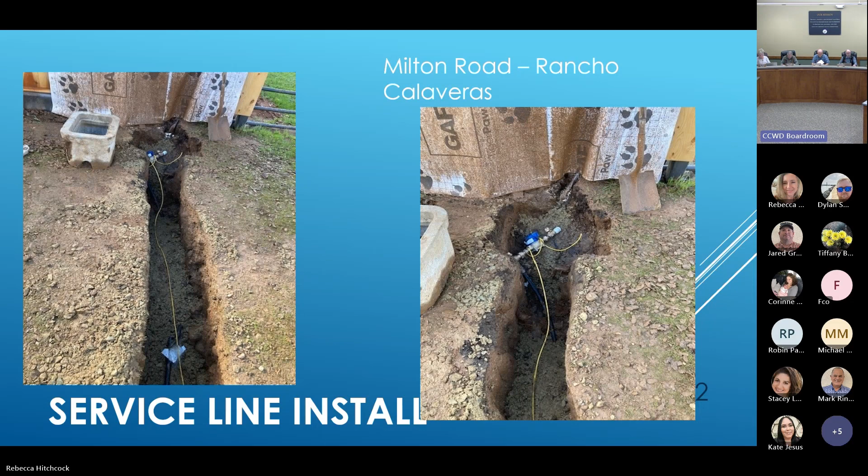So this is a service line install, a new service install off Milton Road, Rancho Calaveras. You guys have seen these before - we mark the water service line, put tape, put wire so we can locate that line in the future. So the image on the left, you can see the tape, water line below tape, and then the connection at the meter set. You see the meter box sitting there with the backfill of the AB over the line.

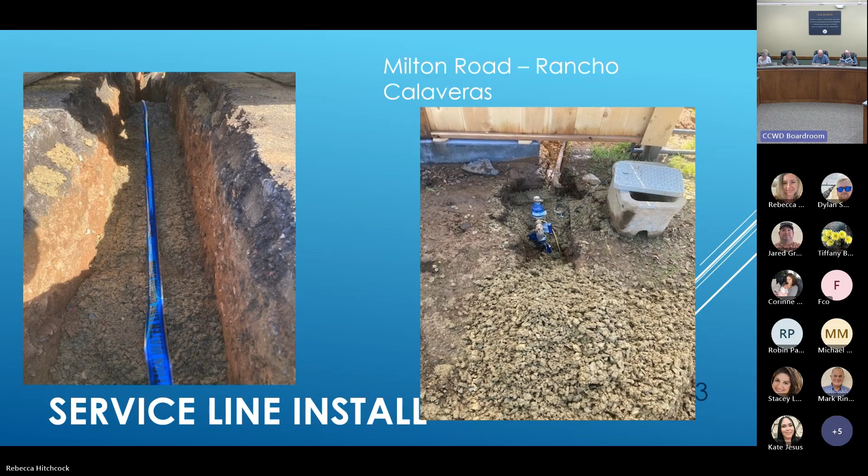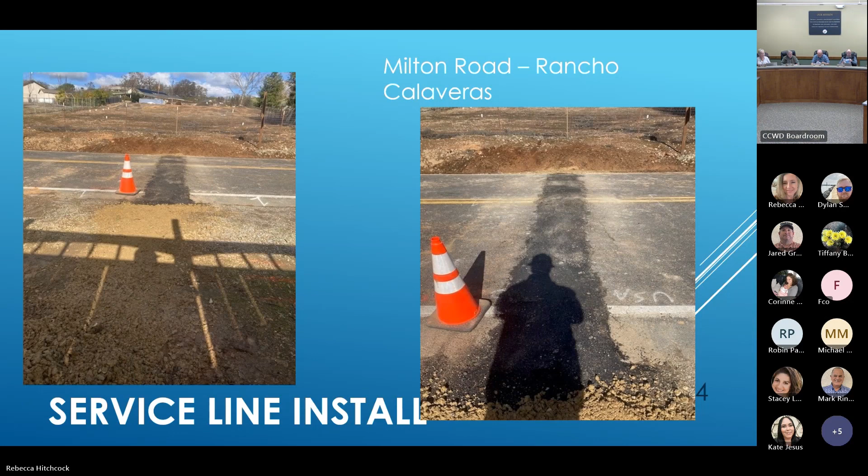So this is oftentimes what is getting final paved. We might have 5 of these and then 3 by 3 squares all over Rancho Calaveras that we kind of add up, so to speak, and then we'll call a paving contractor in to come get that work done.

And so that's what you guys will see through the ops budget in the paving and repair aspect of the ops budget. So this is an interesting one, 2-inch main repair on Jenny Lind Road, Rancho Calaveras. We have a lot of these - this is that old Bluebell line. These 2 inches will come apart at the valve, and what'll happen is oftentimes we'll have to shut the bigger water main down to repair the 2-inch main.

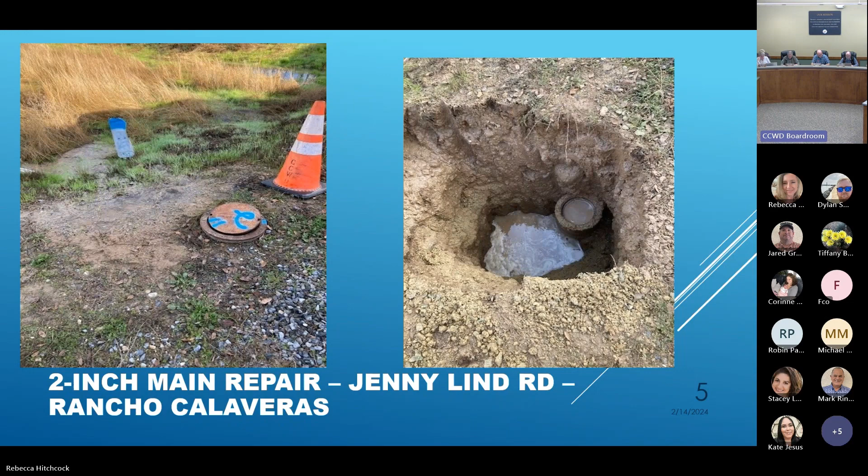So one of the things you're going to hear from staff, if you see them out in the field, is more valves are always better. So if we don't have to shut 500 people off to fix a 2-inch valve, that's always a benefit to everybody. In this case, we had to shut quite a few people off in order to replace this valve.

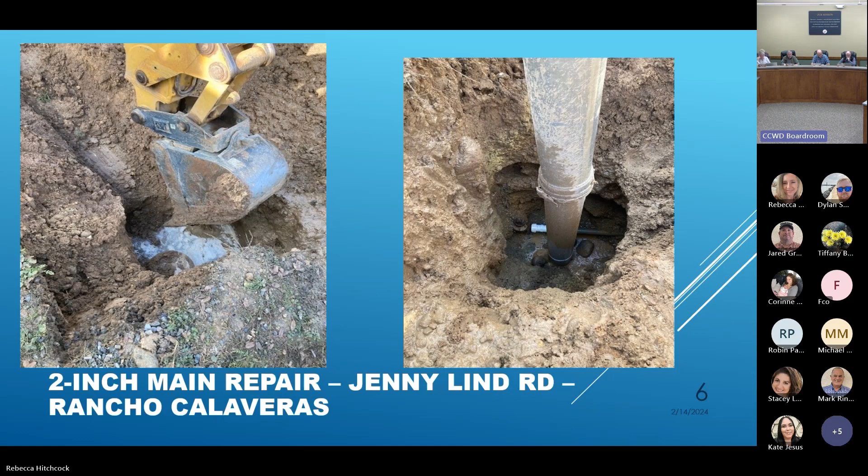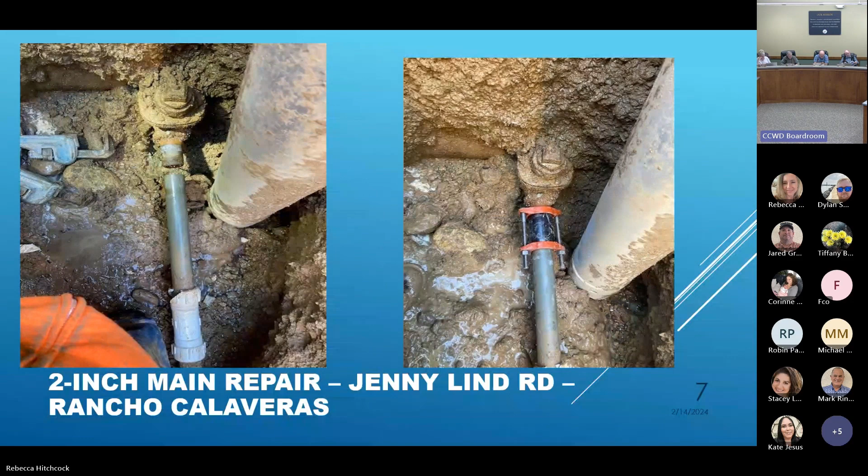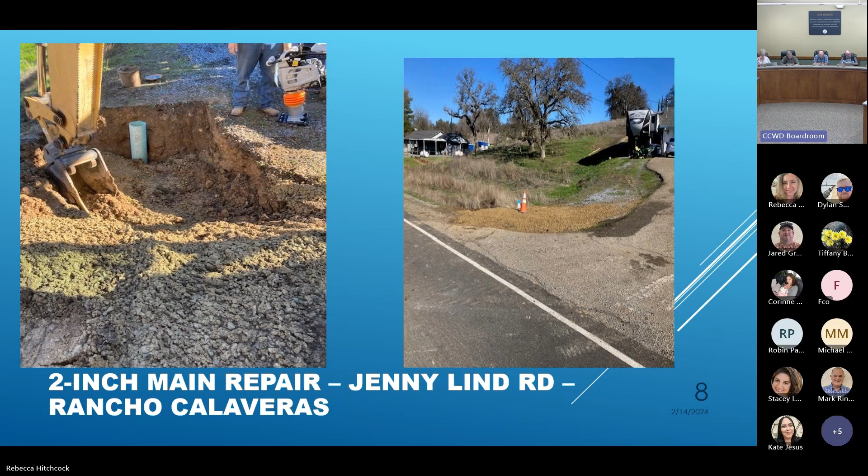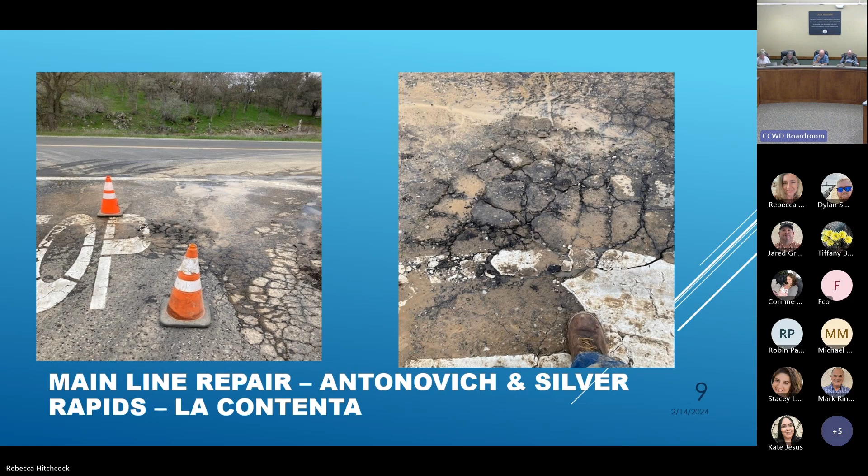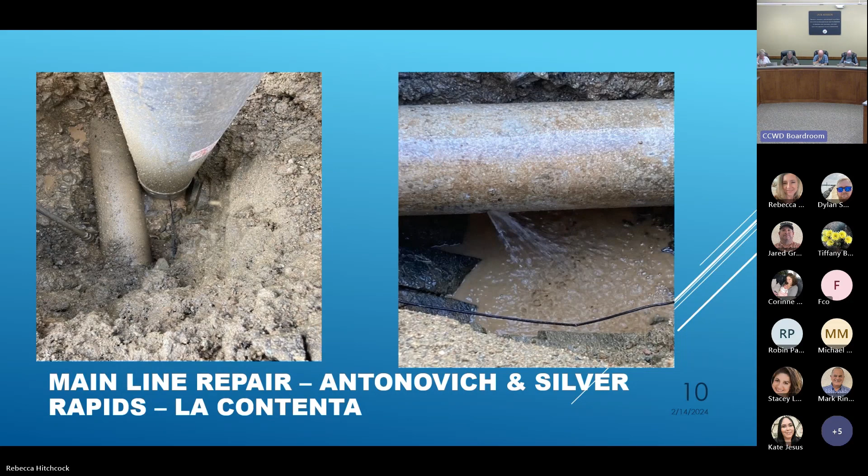Here at Antonovich and Silver Rapids, guys got in there, and what do you know - the water main, the AC main is sitting on a rock there, the original install. So you have this kind of stab over time that works its way through that AC pipe and results in this failure. Repair of AC is usually one of these full circle clamps with 5 or 6 bolts, a repair clamp, and that's what did the trick here.

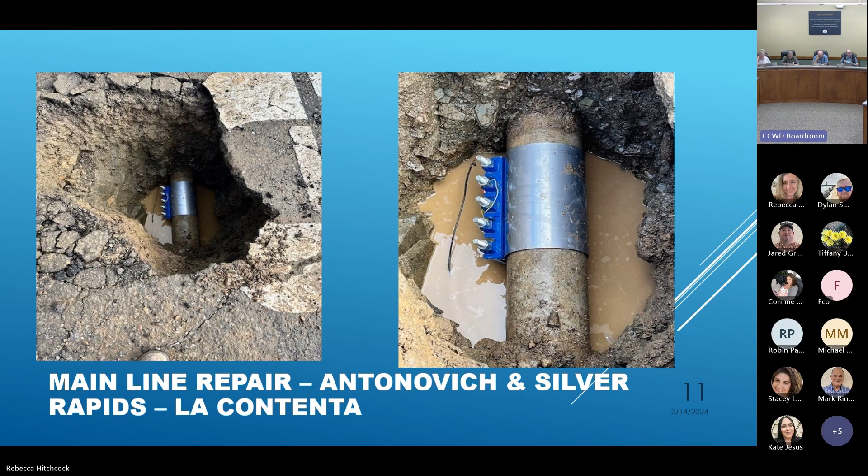And then backfill - it's always nice to see, so there's one of those F550 dump trucks, part of the enterprise lease to own program, a newer truck. Putting the base rock into the hole and then staff whacking it into compaction.

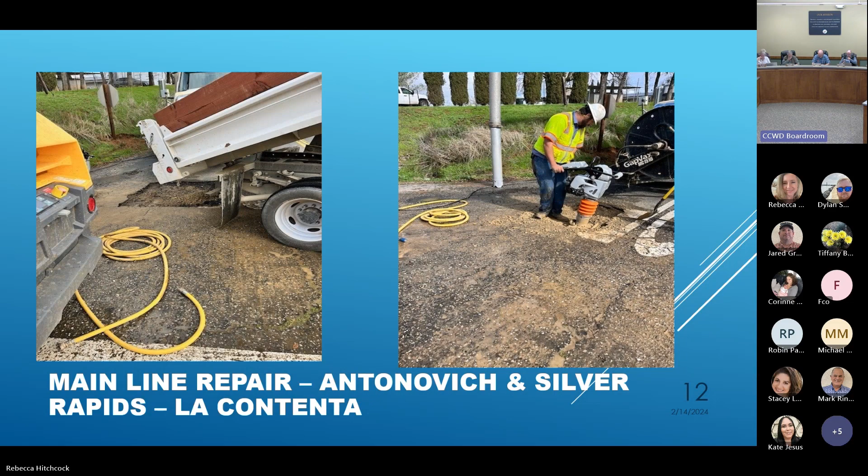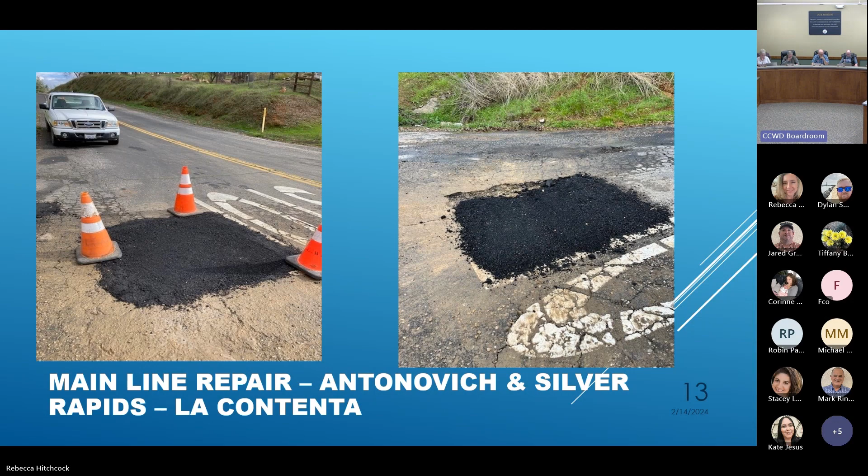And then this is the aftermath. So here's more of that temporary cutback or temporary asphalt. You can see our guys pretty much right on the mark when it came to the failure - the hole is right over the leak, and that's really good work.

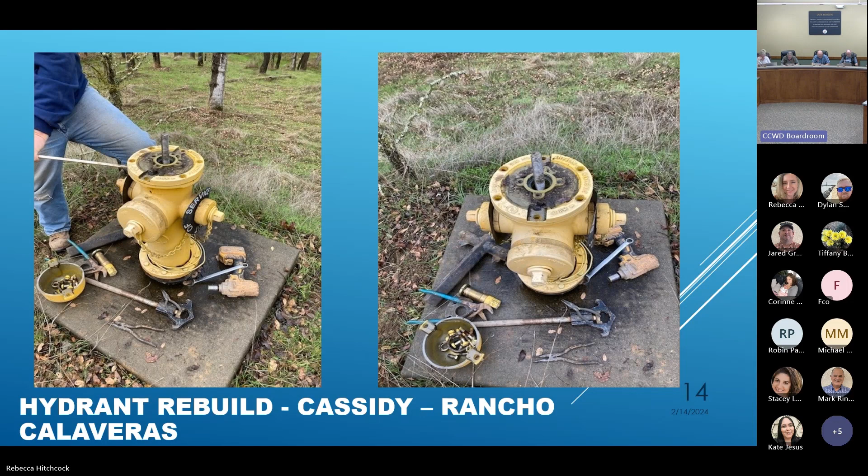One of the staff is getting ready to pry that top off and there's a gasket under there. As they pry that off and pull it off, they can replace that gasket, and it gives you access to the stem of the hydrant. At the bottom of that stem, it's really long, it sits down there in the shoe, well below the hydrant.

Did I pass it already? No, I guess it's the next one.

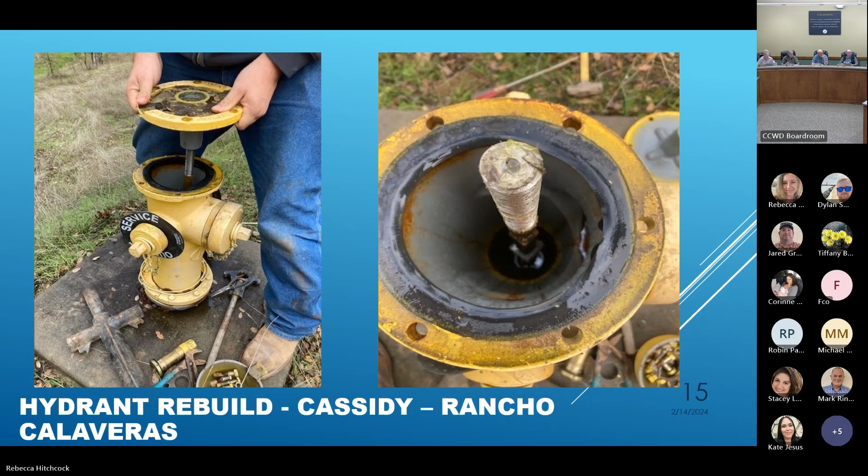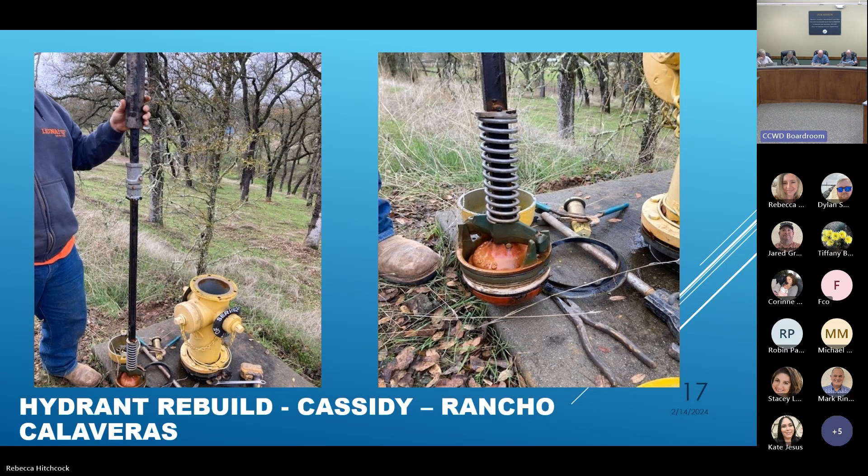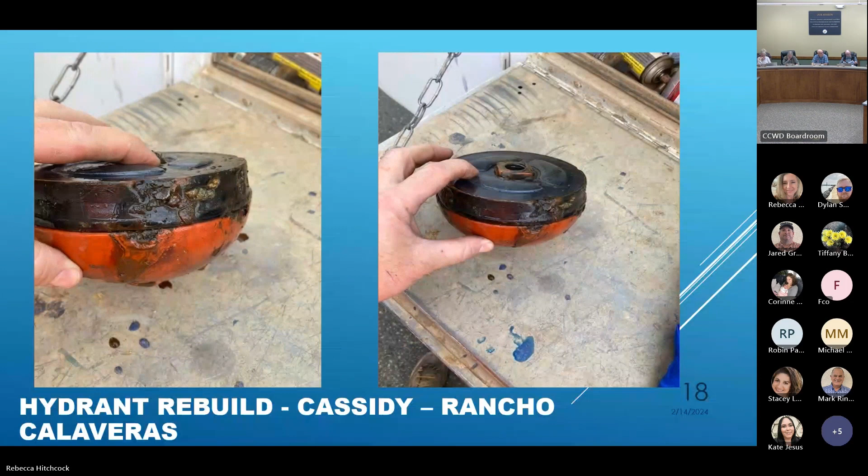So that's what has to be replaced, that's what the guys are doing here. They dismantle the whole unit and then pull that shoe and that valve, that stem, out. And then there you go, that's the burr or the obstruction or the damage to the seat in the image on the left there, and you see it on the right also. They take that off and replace it, and then flush the whole apparatus before putting everything back together, because you might have broken a little chunk of something or other off in there.

How long does it take to take one of those things apart? It depends on how easy it is to get that valve stem out, but that's a couple hour endeavor.

Now, is that just something we do upon a leak, or do we have those hydrants dated and on maintenance?

So what happens with the fire hydrants, Rancho Calaveras folks are really good. The Calaveras Consolidated will go out annually and inspect them all, do a little test, pressure test, clean them, grease them. Then if they find some that are leaking, or we have a list, say a customer called, or we get a customer service work order, we'll usually get a couple together and schedule time, and try to knock some out with the construction crew. So I'd say every 4 to 6 months, we're going to knock some of these out.

And we're made aware in a couple different ways, through customer service, through our own guys noticing that there might be an issue out in the field, or through the fire hydrant inspections from the fire department.

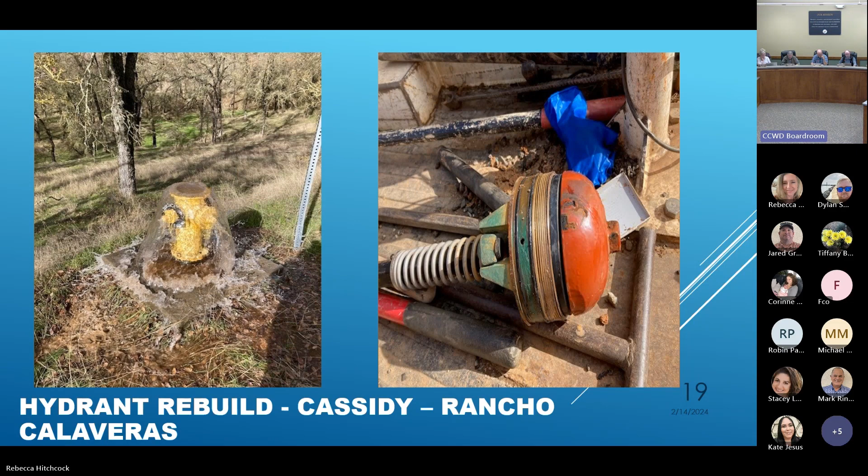And how much are they charging us now? It's $25, still at 25. Okay, that's great. No inflation, no change.

And so this image, our crews do a fabulous job of meeting all the demands of their systems, and they're challenging, right? So Rancho Calaveras, we're all aware of how many service lines are failing and how much work they do associated with that. But they're also carving out time to rebuild fire hydrants, and they're also flushing unidirectionally.

What they're doing, the objective is to get the dark iced tea looking manganese out of the system before it ends up in folks' taps. That's really the objective, and it improves water quality, improves customer service and supply reliability also. So what happens is they will isolate and focus the water flow through a certain main.

Say they want to flush 500 feet of a 6-inch line, they'll calculate the volume in that 500 feet of 6-inch line and calculate the velocity at which they can scour any of the debris that's stuck on the bottom of the pipe to get it out of there. And the result is this unidirectional flushing effort.

Does that manganese tend to sit in our low spots, or do we kind of know? I mean, we don't mess with necessarily the higher use areas that have a lot of flow. Is it a low elevation problem? That's true. So we've done it both ways. We will focus on the identified problem areas, but we've also had a conversation about starting really from the treatment facility and working our way throughout the system, because you never really know. Sometimes you're surprised by how the distribution system works.

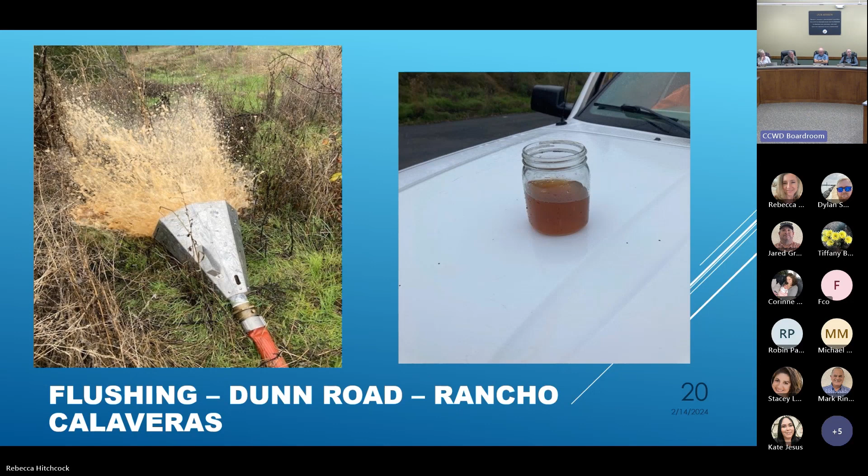Moving up to Ebbetts Pass.

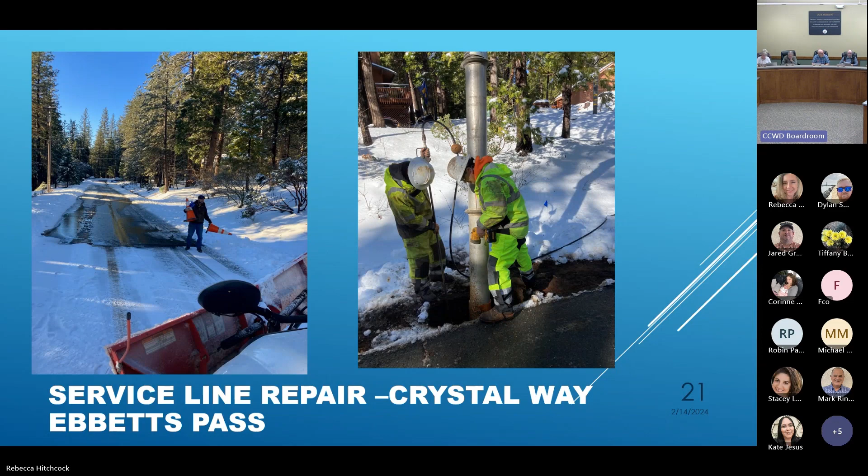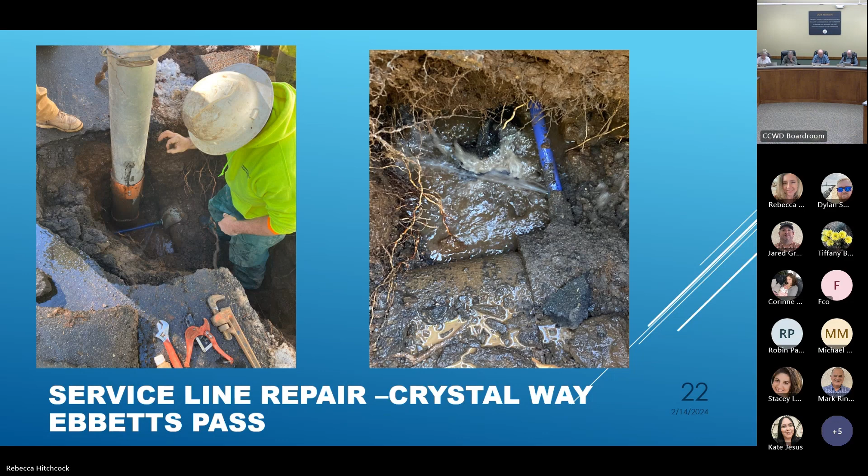It's quite a different challenge when it comes to repairing a 1-inch service lateral. You're dealing with obvious weather conditions, and not that safety is not always heightened, but in this kind of situation, I think everyone's mind of safety is a little bit more focused. You can see in the image on the right the 1-inch service line that has a leak, I believe at a curb stop. The work that goes into getting it repaired, dealing with the snow and everything, can take quite a while. So there's the repair in the image on the right.

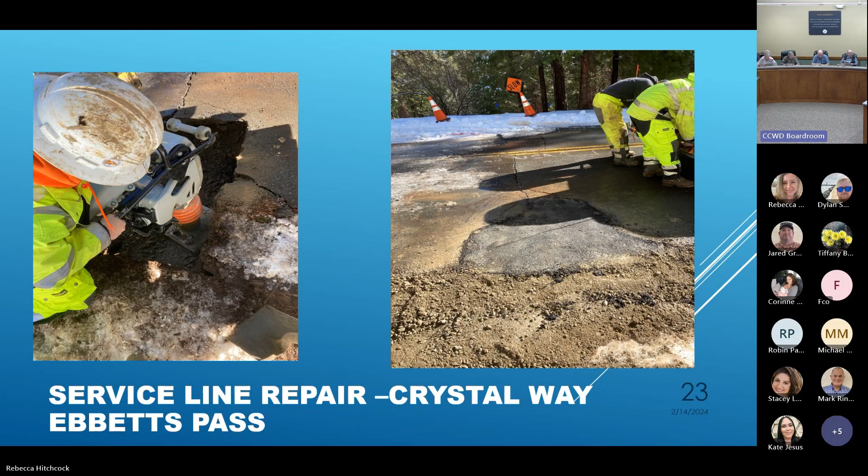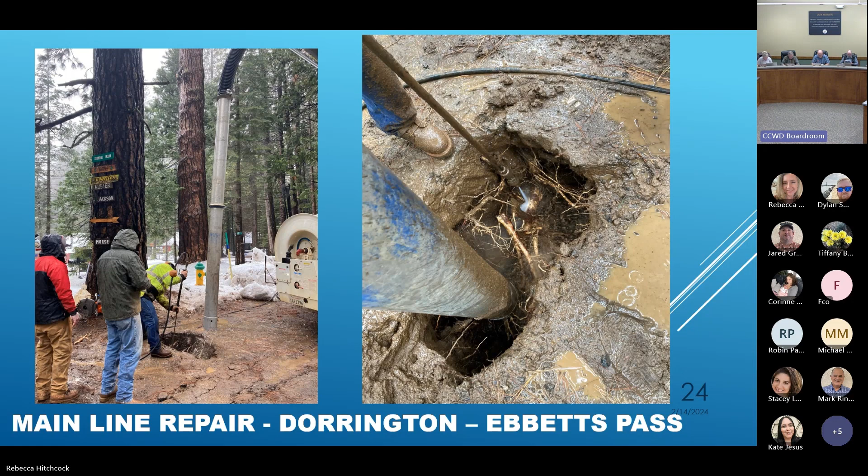We have a Dorrington pump station that pushes water up to our Big Trees tanks, and there's a 6-inch main right outside. You can see the tree here with all of the addresses on it, and in the image on the right, just how full of roots that hole is. Obviously trees want to find water. In the image on the left, I think this is Bill Heinley cutting out all the tree roots so we can get to the water main.

In the spirit of Valentine's Day, trees love water, so they like to wrap themselves around the water main, and they eventually just squeeze the water main until it breaks. So the roots are growing, they're finding the water, and that's what happened. Then when the wind blows and those trees are rocking and those roots are moving, you can also snap a water line, and that's what happened here.

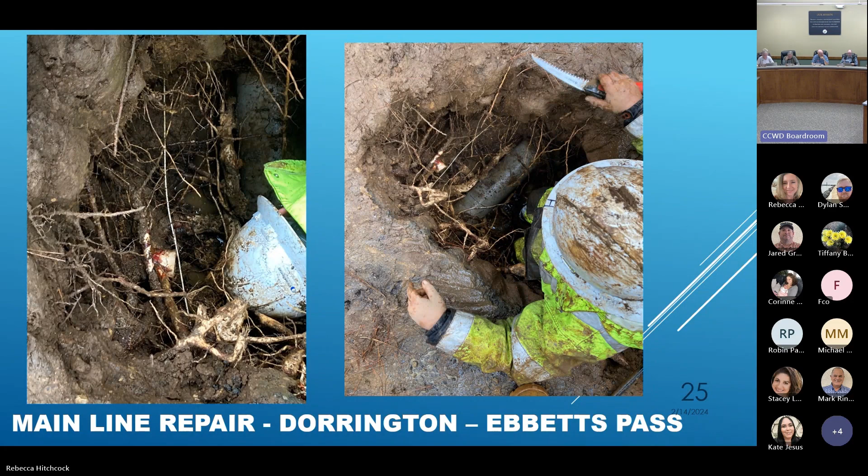A lot of work - you can see he has a small saw in his hand, just focused on simply being able to get to the water line. It's so covered in roots. It's kind of hard to make out here in the image on the left, but you can see just a crack - the main is just fully cracked.

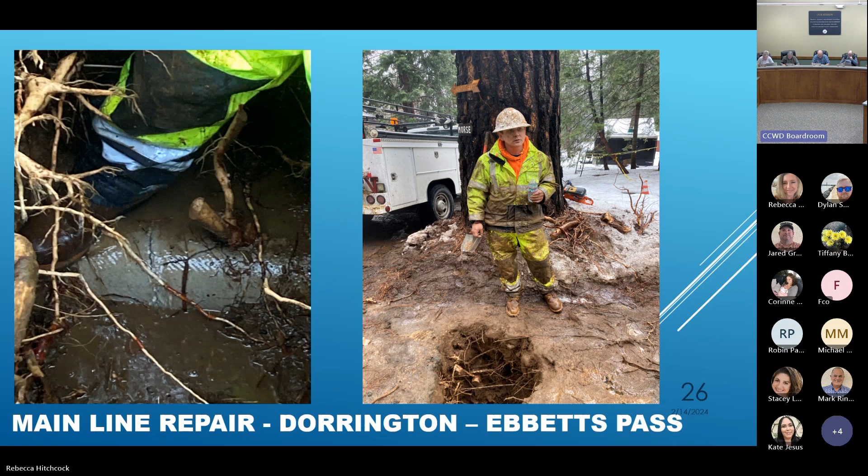And there's Bill after doing all his pruning work - quite clean work. So there you go, the crack or the shear break of the AC main, and then the full circle repair clamp with the 6 bolts.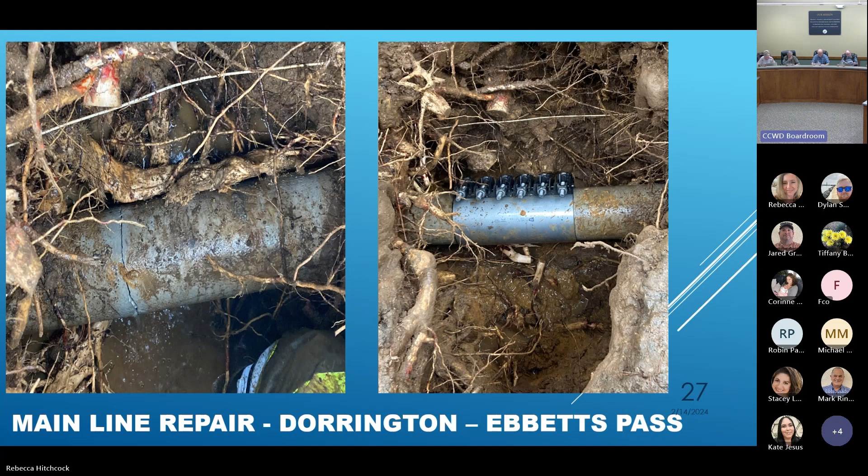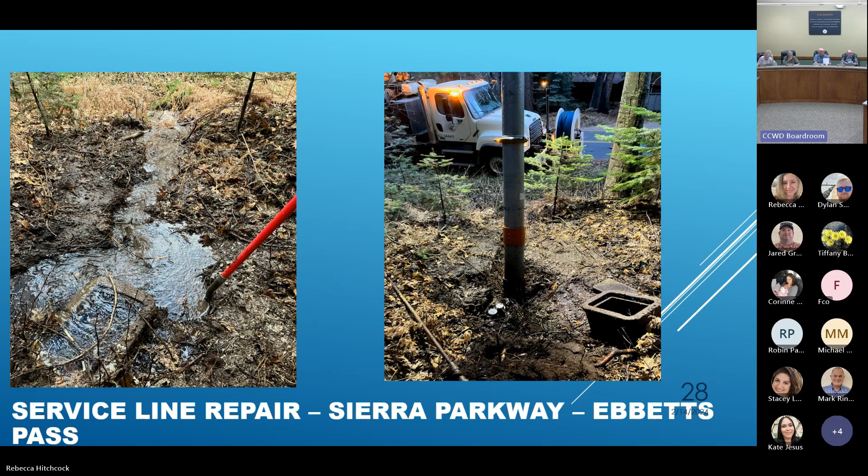So here's a service line up on the pass. Obviously sometimes the service line can just shoot a lot of water out, and that's kind of an image of that. You can see the vac down below with the pickup tube all the way up the hill, exposing that. This is that curb stop.

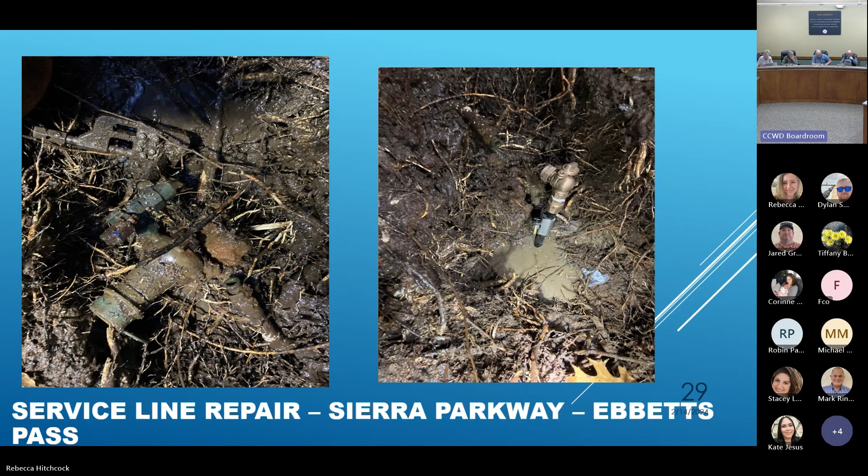Replacing that curb stop there - quite a clean hole, working in the wintertime. That's what everybody loves, is how nice and dry everything is. Just hats off to the guys.

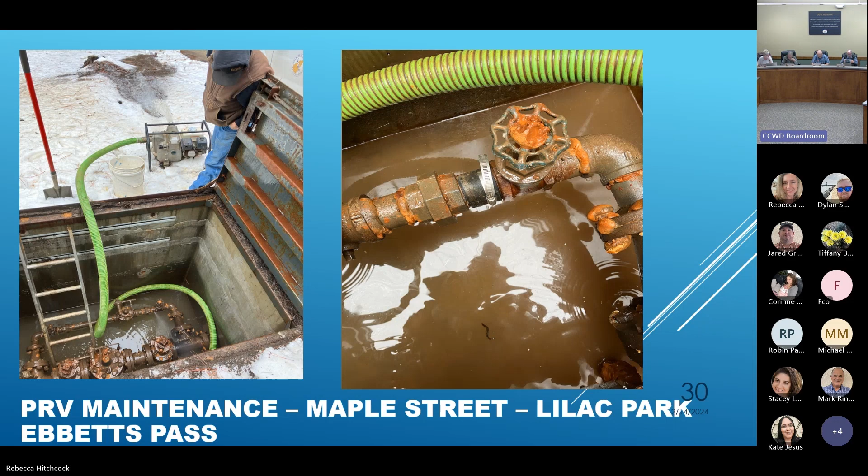PRV maintenance - pumping out all the water out of the PRV. You can look down below and see the apparatus. All of a sudden there's water spraying out, water spraying out of a coupling. The guys grab hold of some hose clamp and some neoprene and fix that temporarily so they can stop the leak. Then they put a pressure monitoring device on the pressure reducing valve and monitor how it operates.

Hats off to the folks up in the distribution crew up on the pass right now. They're really doing a lot of work to understand how pressure is working up there. There's 100+ pressure zones and PRVs in the pass - it's a very complicated distribution system. They're really working to understand the system and to make it less scary, frankly, so we can understand how it works. Are we still maintaining it at 125?

Was that the PRVs? Well, it depends on the end user of the PRV. So you're going to adjust that PRV accordingly. You might send less pressure out and it might be 125 down at the furthest place. The goal would be to send water out that's usable and to not over pressurize.

Right, I know the process. White Pines had that problem where they had variables. I'm sure Kelly has many, many stories about the PRV work that's gone on.

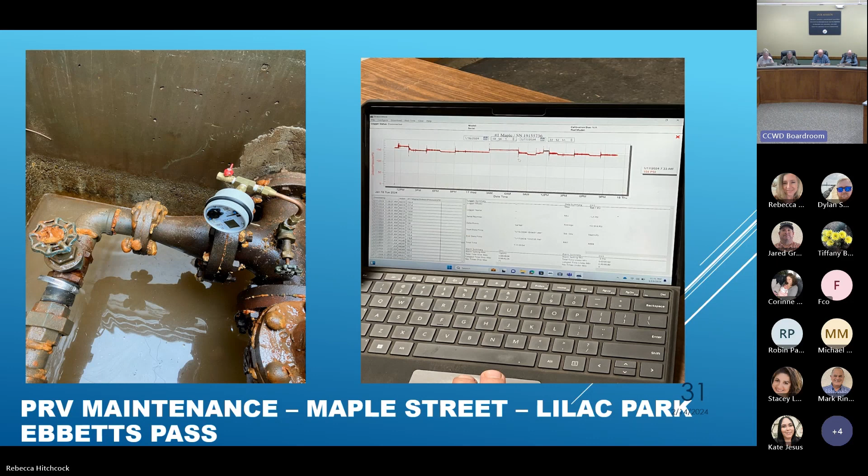How many customers are connected to this particular sawmill? Oh, a lot. I would say that's the heartbeat of Arnold in terms of water supply. I think it's safe to say half, at least half, so half of the 6,000 plus customers are up there.

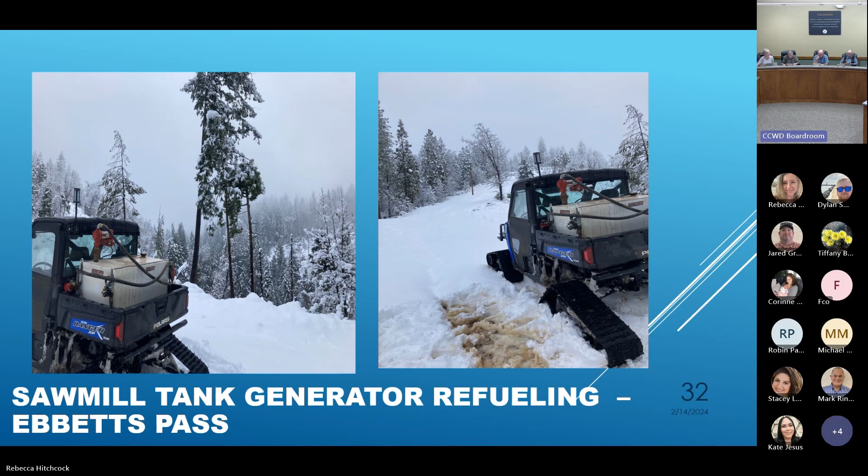It needs to be replaced. The tank is old.

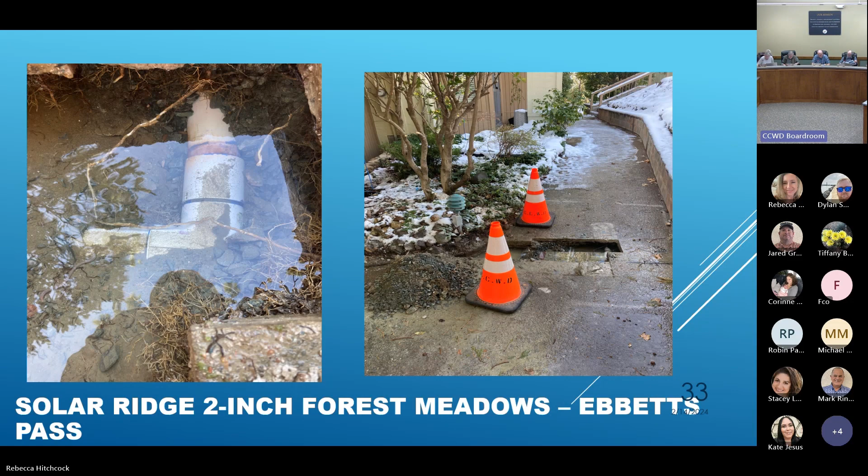Unfortunately, so here's an image of another 2-inch repair. This failure just uncoupled, and staff were able to cut out a nice clean section of what's like concrete and then get in there and make a repair. Hats off to them, they do great, nice, clean work.

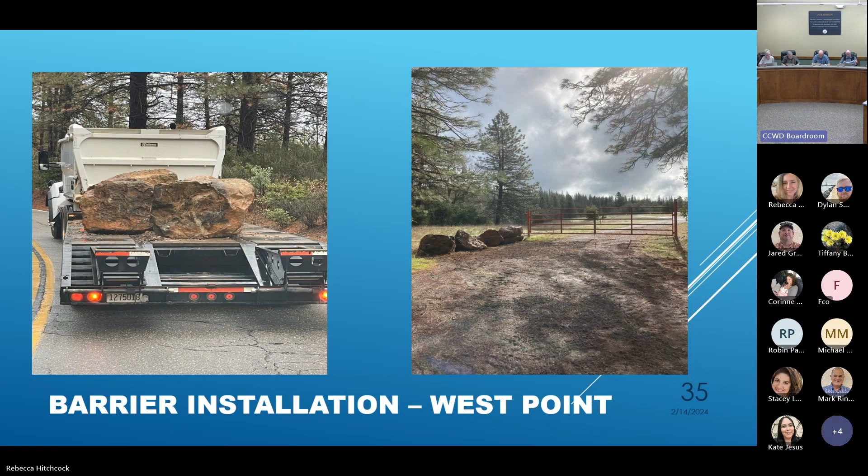Working in close quarters. Here's some interesting work that our West Point distribution, treatment and construction crew worked on as they pulled out a bunch of very large rocks that the West Point Wilseyville project exposed, and they used those to create barriers at our property to inhibit trespass. They did a lot of work with these nice big rocks and some old concrete that they had found, and they're doing a great job there.

This is a repair on a water line coming from the Middle Fork. This is a Y that conveys water from the Middle Fork pump station to the treatment plant or to the Bummerville Reservoir, and there's a secondary pump station. This failure occurred right near that secondary pump station. It's kind of hard to tell in the image on the left, but it's not really a very well mechanically constrained Y. The image on the right is actually the new work.

You can see that ductile iron Y in the middle with the yellow mechanical couplings. Then you can see what are those called, gosh, they're slipping my mind right now, the hydro seals on the dark blue Hymax, yeah, in the dark blue on the right. Those things are phenomenal. They're one bolt and they just lock in and that thing won't move.

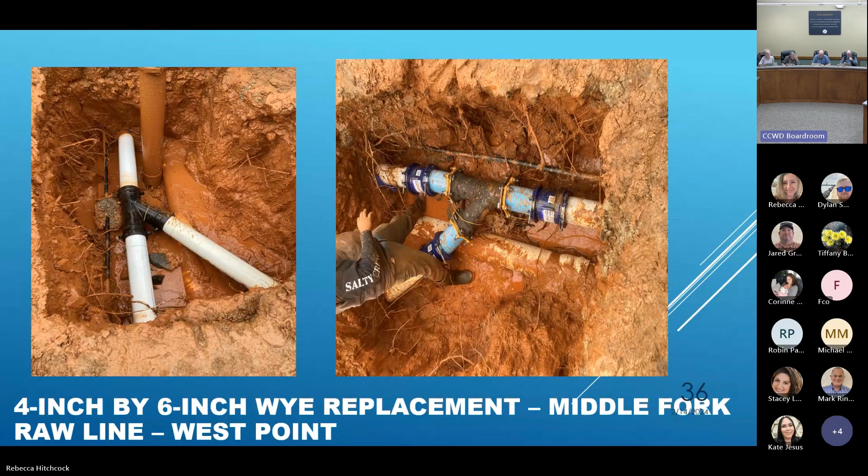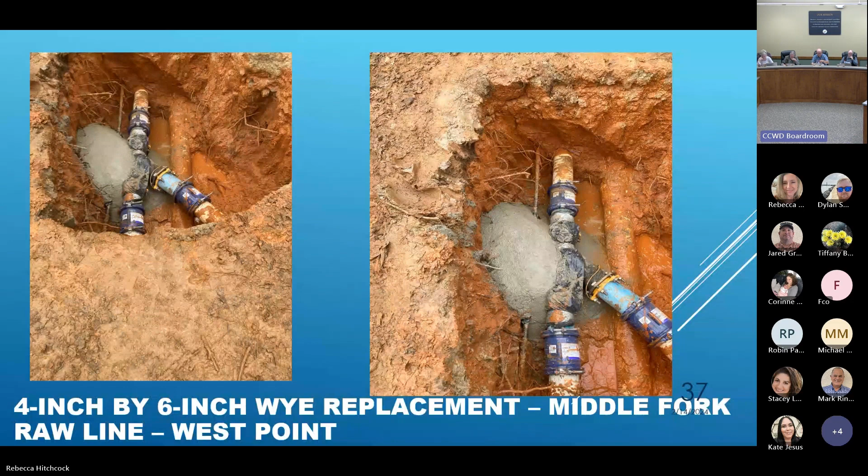What's really interesting is you kind of have to be somewhat experienced in fluid dynamics to understand how this Y is going to work and how to, what we call, kick it. So you're going to put a restraint in place. In this case, our construction crew poured that concrete restraint against the Y to reduce the force of the water as it flows and hits that Y in return. Hats off to those guys, they do fabulous work, and there are times when our whole water service area in West Point depends on that intake.

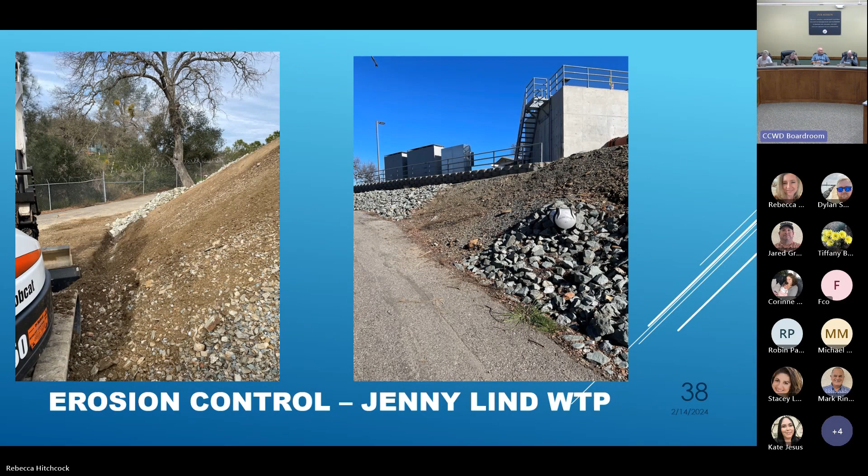It's an important piece of infrastructure as well. That's right, erosion control at the Jenny Lind Water Facility. Last year during all the rains, and starting again this year, we started to see some increased erosion. So the guys got out and rocked the whole site. It looks fabulous, did a great job, cleans everything up, and really good work.

Where'd you get that rock? I'm not sure where they got that. Yeah, it'll be right next door. I would think so, but I'm not totally sure.

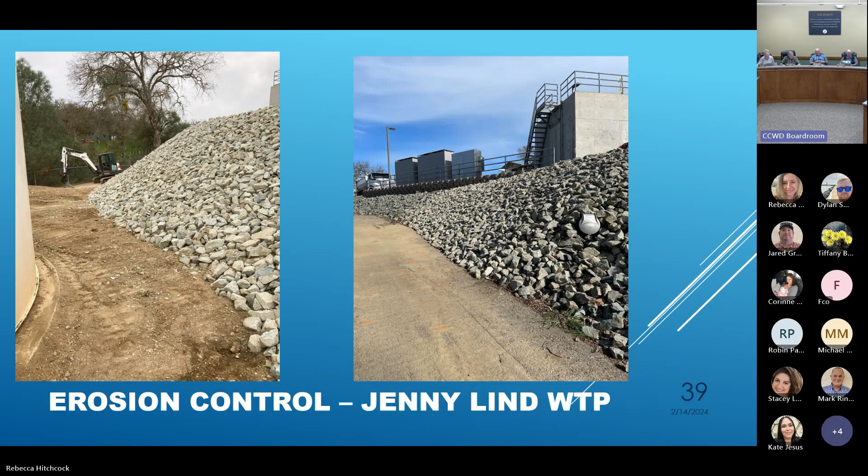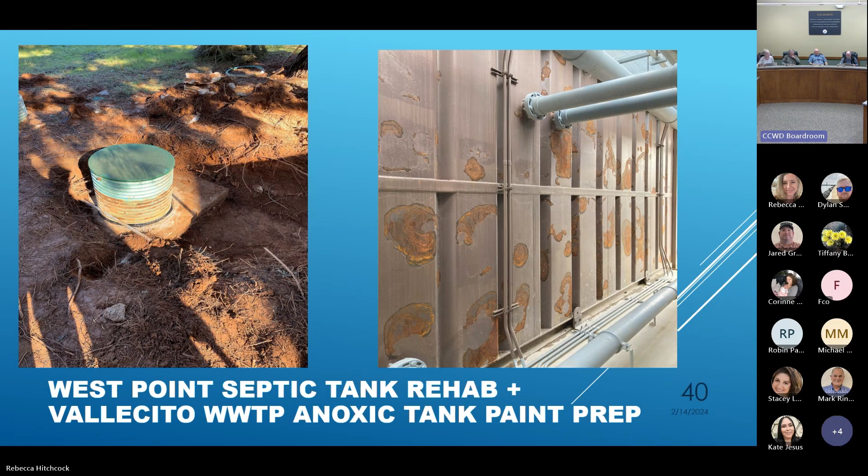This is a project we're working on at Vallecito where we're taking all the paint, this paint is sloughing off this anoxic tank, and we're gonna repaint that this summer.

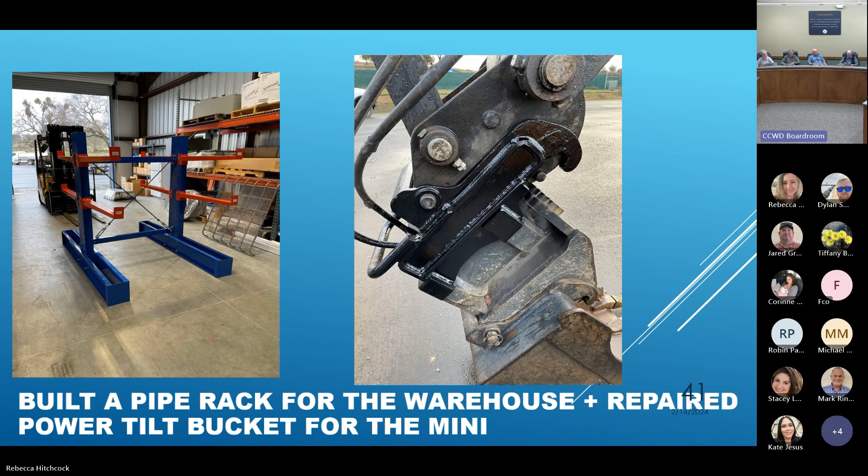Can't say enough great things about mechanics and the construction crew. You can see the pipe rack construction, but this power tilt bucket, a replacement for that power tilt bucket was almost $20,000. Our mechanics looked at the power tilt bucket, which no longer tilted or moved or did anything, and said, oh, we can fix that. So they fabricated those black painted parts to put that thing back into service, and that was a huge deal, really great cost savings for the district with talented employees.

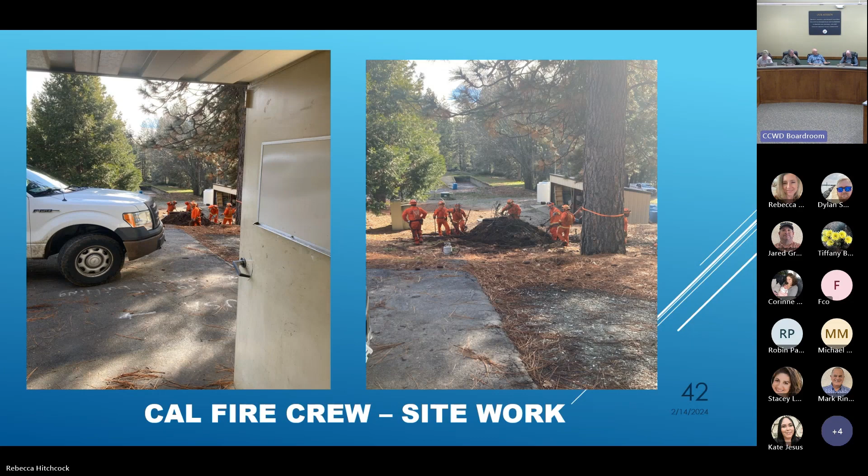We also leverage the CAL FIRE crews who do a ton of work for us. You can see here that they're moving a debris pile up at the Arnold wastewater facility. They're always grubbing and brushing, we're always putting them to work, and in turn they gave one of our CPOs, Ron Rose, a nice thank you cup for everything. He keeps those guys in line while they're out there working with CCWD and does a great job, having a lot of really good conversations with those folks. Hats off to Ron, he does a great job.

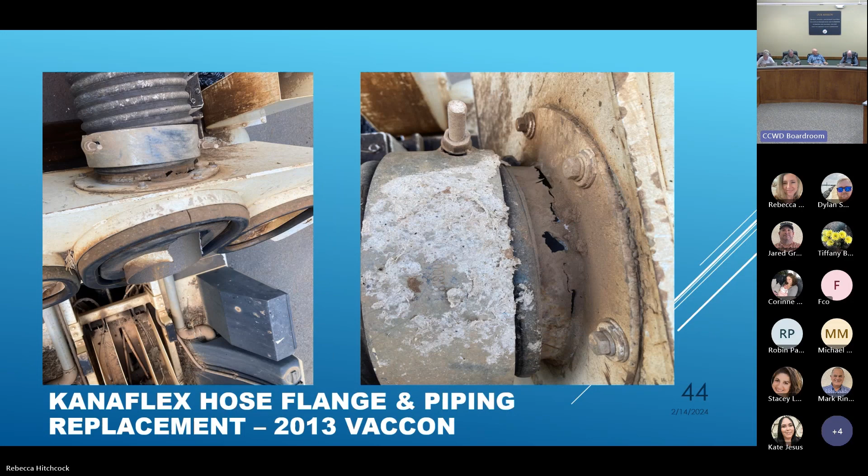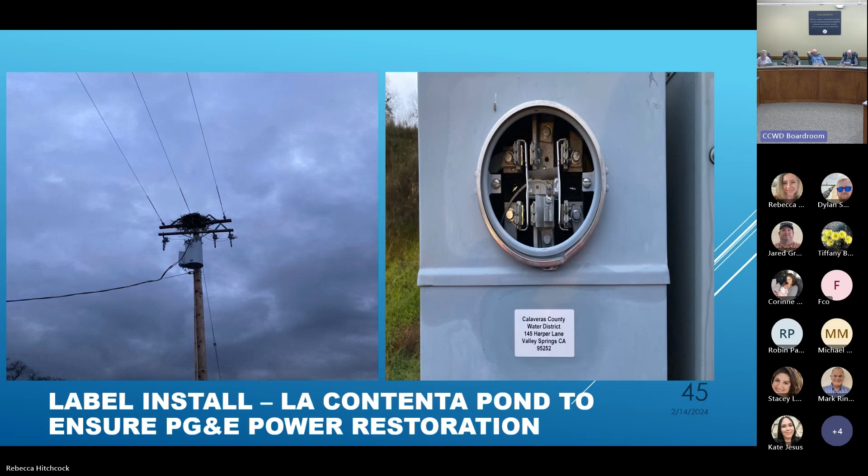Why was that terminated? Well, there was a fire there, and I just don't know why it was never reestablished.

So our folks out there, we had that big rainfall, that whole era started a lot of stuff, when we were using the snow blowers, or hydro work, snow machines basically. We definitely need those because that could certainly occur again. Tip of the cap to our guys who said, hey, can we get this going? Kevin actually worked with Annie from PG&E and she was on the ball too. Do we still have those machines? We do. Do we ever exercise them or can we now? Make sure they're operational and stay operational, yep.

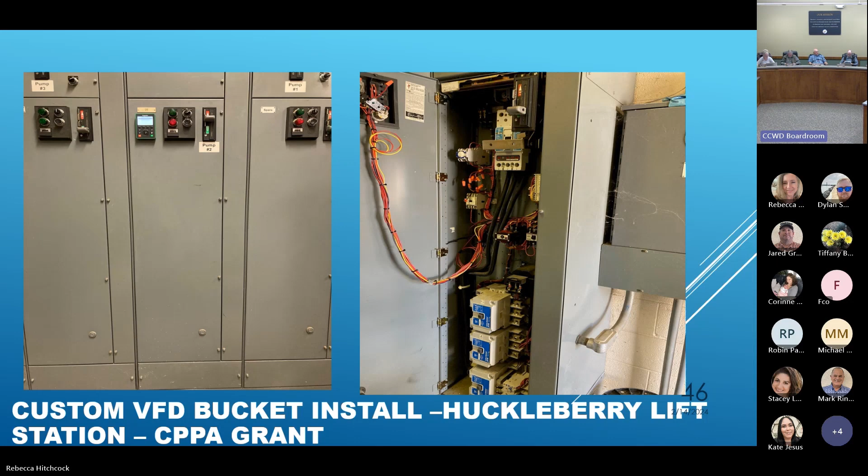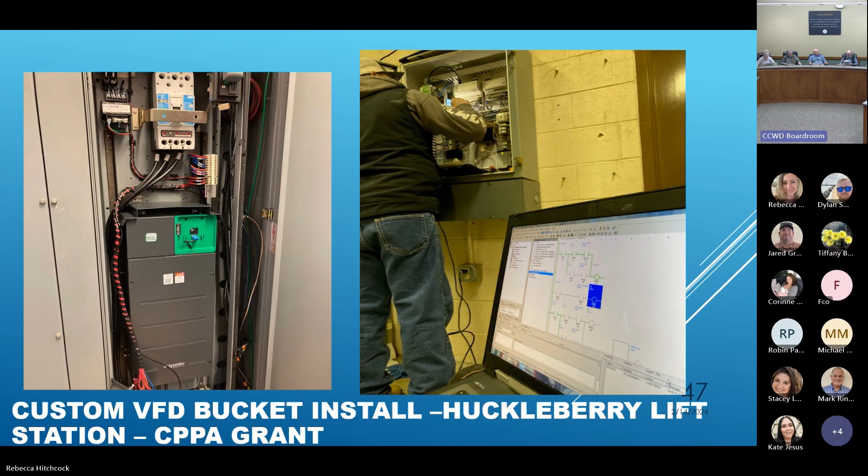Custom VFD bucket install at Huckleberry. This is part of the CPPA grant that the district received to install new VFDs at the Huckleberry lift station. Our electricians did the work, a great project, and the equipment was paid for via the grant and installed. You can see the electricians, it's such a unique job where they install mechanical work and then program that equipment, making sure it operates effectively. They do a great job.

Installation of a Parshall flume flow meter and then control panel replacement for a septic tank. They can go from working on a district treatment facility to a septic tank control box in somebody's backyard, with really compelling photographs to boot.

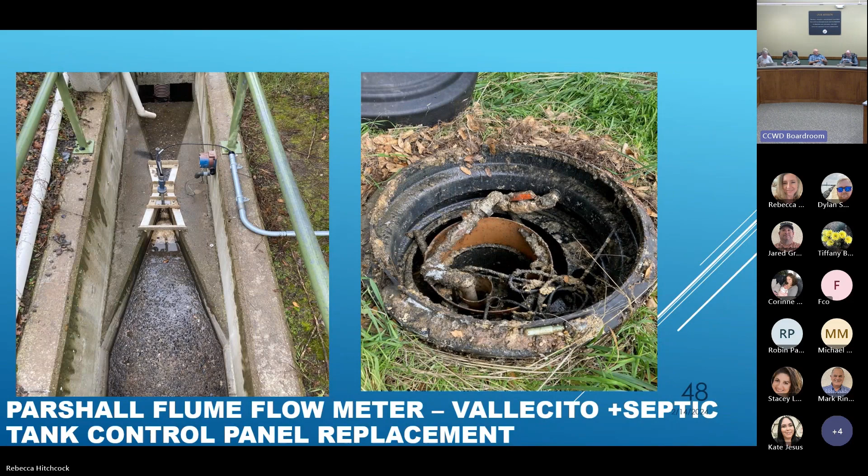This is another component of the Jenny Lind, or the CPPA grant. This is the Jenny Lind water plant, all LED lighting is going in, equipment paid for through the CPPA grant.

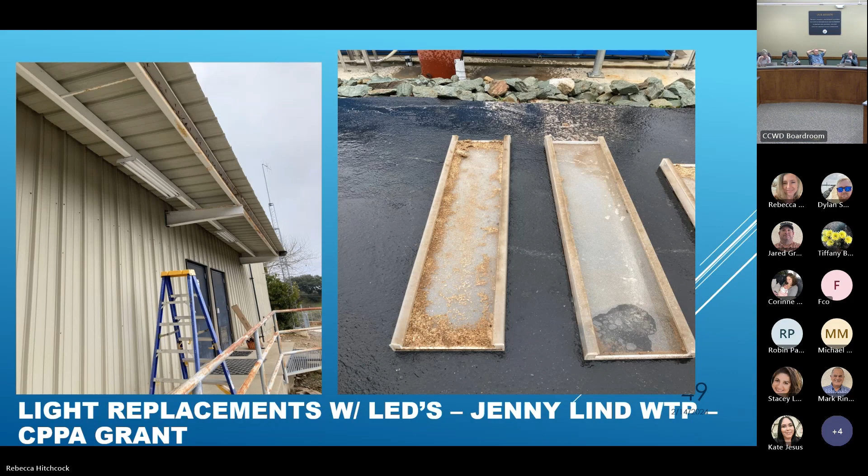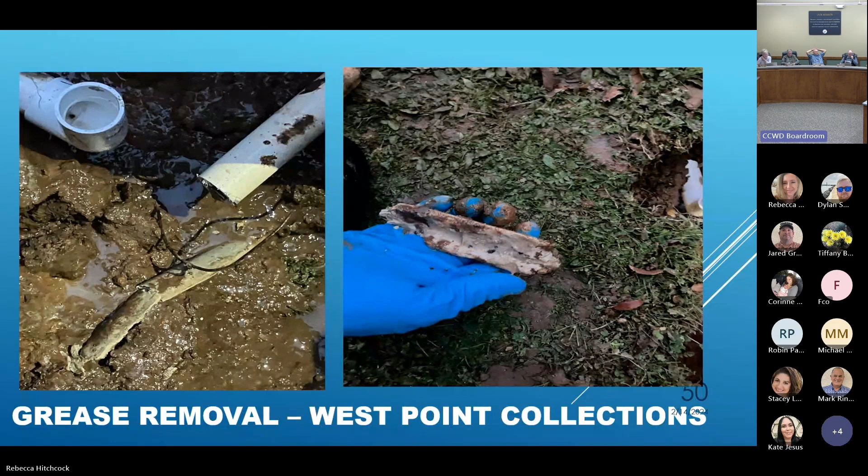Does this happen close to particular businesses, and then you show them what came out? Yeah, absolutely, hey, come take a look at this, because some of us may not realize until you actually see it. And so then we have to put everything back together. We take it apart, clean it, take photographs, restore flow, and put it back together.

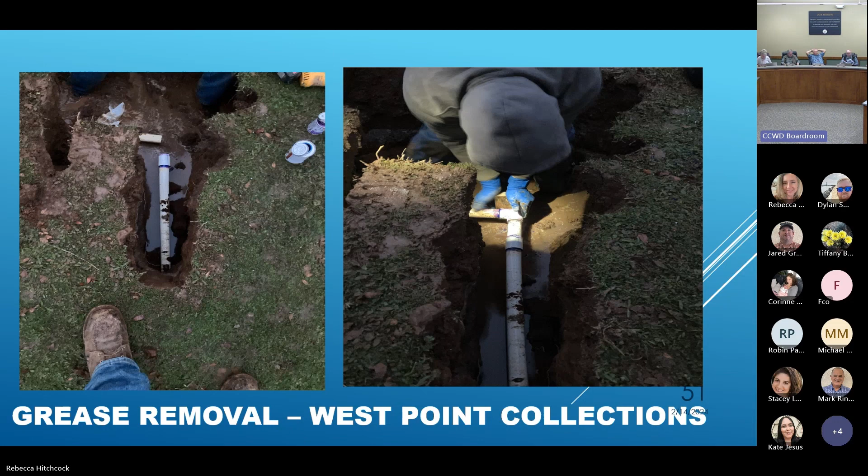Every once in a while, folks will reach out to the district and ask if we have any experienced staff that could participate in a panel interview, or there's various things. In this case, it was an interview for a distribution worker for the city of Lodi.

It was really actually pretty interesting - it sounds like it was all internal candidates. There was one city of Lodi representative with HR, and a representative from Calaveras County Water District, the city of Dixon, and I believe Merced. So folks from other utilities, who don't know these people from Adam, were able to participate in the interview and then provide their recommendation to the city.

So really, really interesting. I thought that was really great to see, for somebody to participate in something like that.